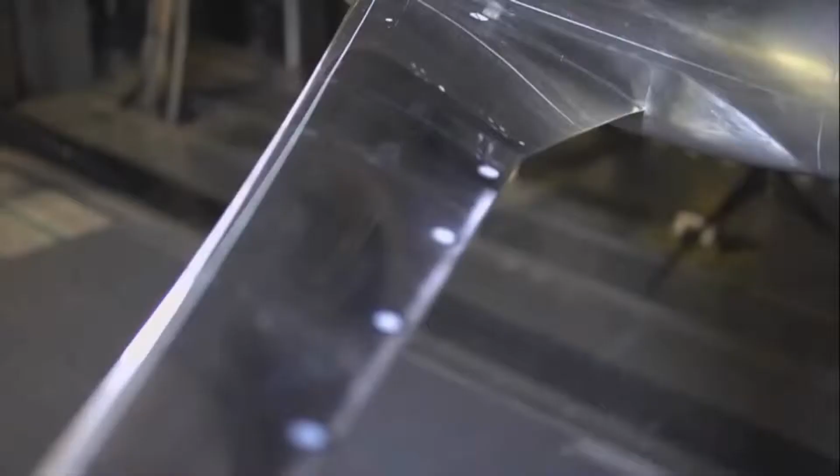Although it's clear that future events remain virtually unknowable, there is one group within NASA that comes as close as you can to seeing into the future. Throughout NASA's field centers, members of the Fixed Wing Project team are peering into the future every day and coming up with concepts that they believe will be on the next generation of aircraft. Because it takes years to plan and develop these concepts, the hardware and theories that are being tested today will be key components that enable the next generation of aircraft to take flight.

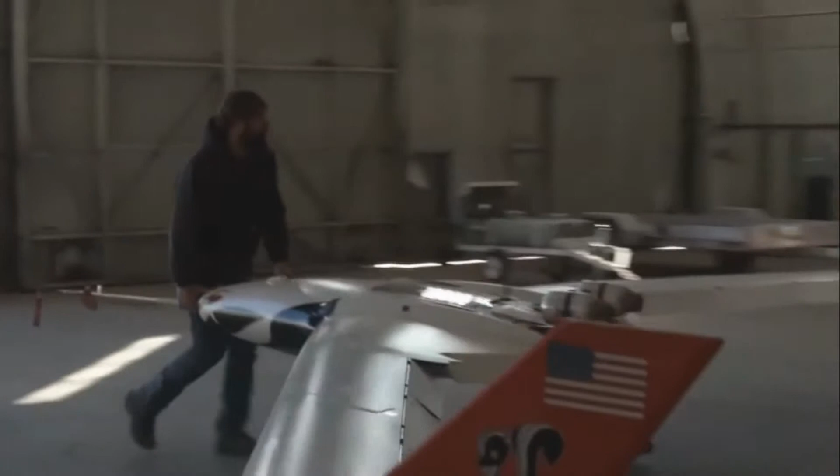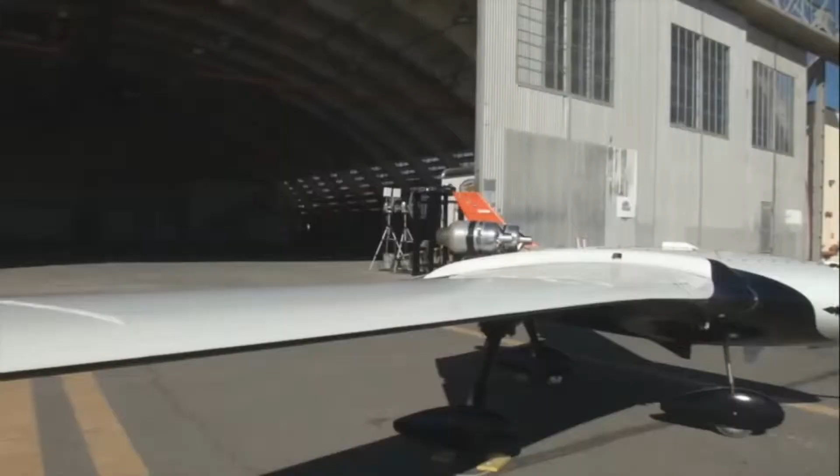On this episode of NASA X, follow us around the country as we visit members of the Fundamental Aeronautics Program's Fixed Wing Project, who are developing the framework that will shape how aircraft of the future will fly. Take a look behind the gates of NASA to see what some of these new ideas look like and how the engineers of NASA are paving the way for the ideas that will change the future of flight.

To the untrained eye, most of the aircraft of today look very similar. This is because over the past century of flight, aeronautical engineers have worked hard to optimize passenger aircraft to the point where they are as efficient and safe as possible. As a result, the basic tube and wing shape has been configured and examined from every possible angle, making it the most efficient design possible today.

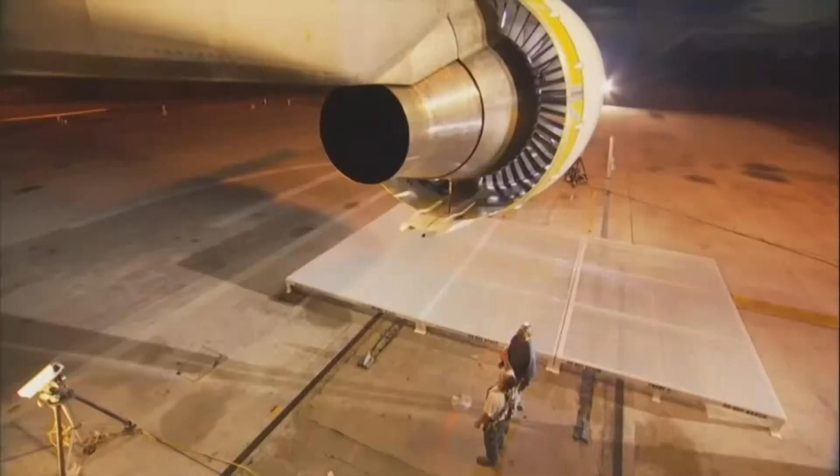Although aircraft have looked basically the same over the past few decades, if you look closely, you can see some of the major design changes. Wings that were once swept back more dramatically now are less so because of advances in aerodynamic shaping. Engines that spewed emissions by the ton are now much more efficient. Materials that were once so heavy that they significantly weighed down a craft are now much lighter and stronger.

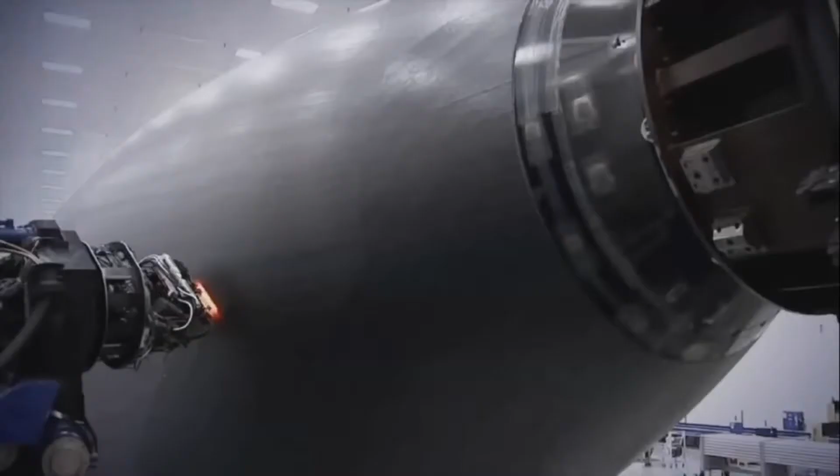With all this improvement and efficiency, it is fair to ask if there is anything else that can be done to make flight even better. The answer is of course yes. Behind the gates of NASA, there are scores of researchers who know that we can still make aircraft better because they are working toward these long-term goals every day.

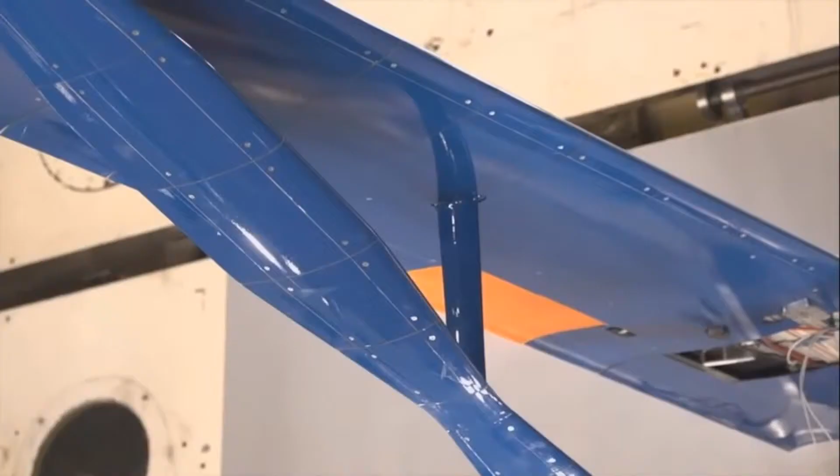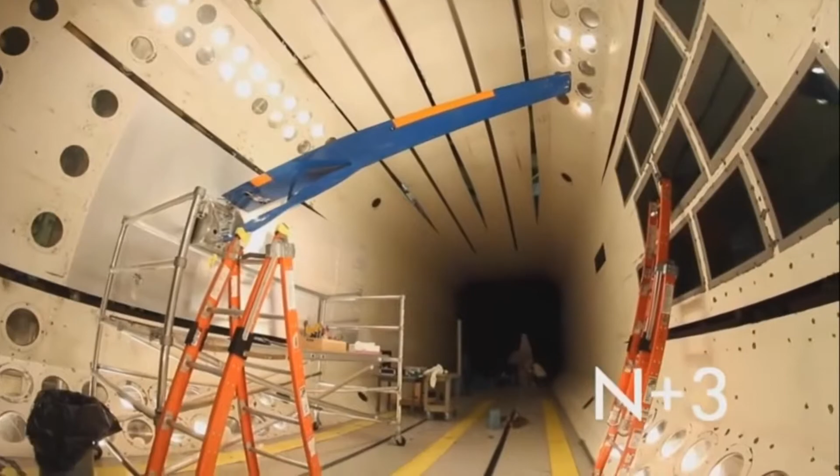Some of these researchers from the Fixed Wing Project are working on so-called N+3 configurations and goals. In mathematical terms, the letter N is where you start now. N+1 is the next step. N+2 is just beyond that, and so on. Here in the Fixed Wing Project, N+3 equates to aircraft that will be flying in around the 2030-2035 timeframe. For this team, everything is on the table, including engines, fuels, wings, and fuselage shapes.

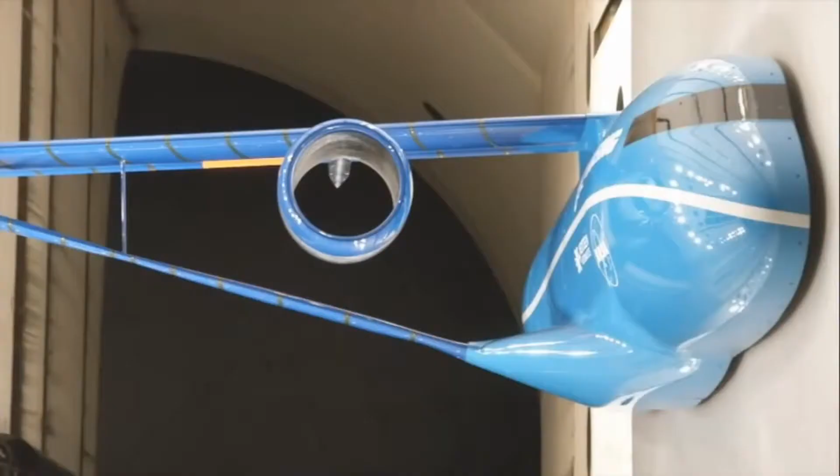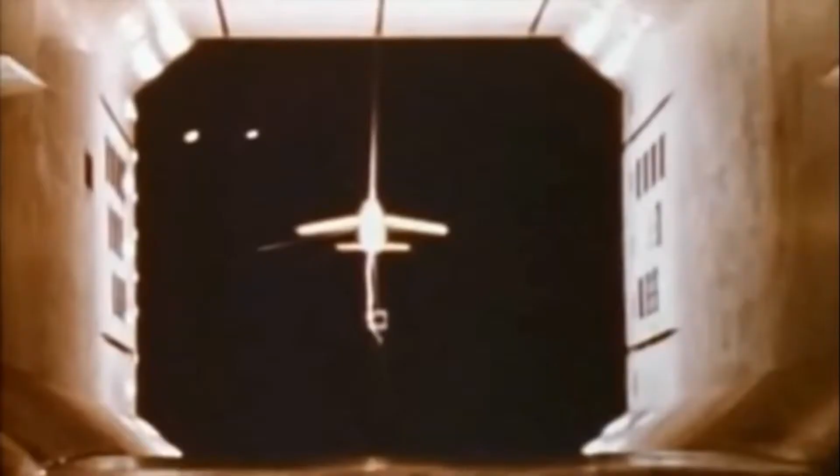Well, we need to remember the first A in NASA is aeronautics. So it's a National Aeronautics and Space Administration. Aeronautics is the field of research for airplanes. The airplanes that we fly today were researched and experimented within NASA many years ago. So we're trying to continue that tradition, that important work that we have done for the nation and the world for 20, 30 years from now.

Fixed Wing is a NASA research program where we are doing activities to try to improve the airplanes that we're going to be flying in the future. We're trying to make them less noisy. We're trying to make them better for the environment. We're trying to make them in a fashion that they will use less fuel.

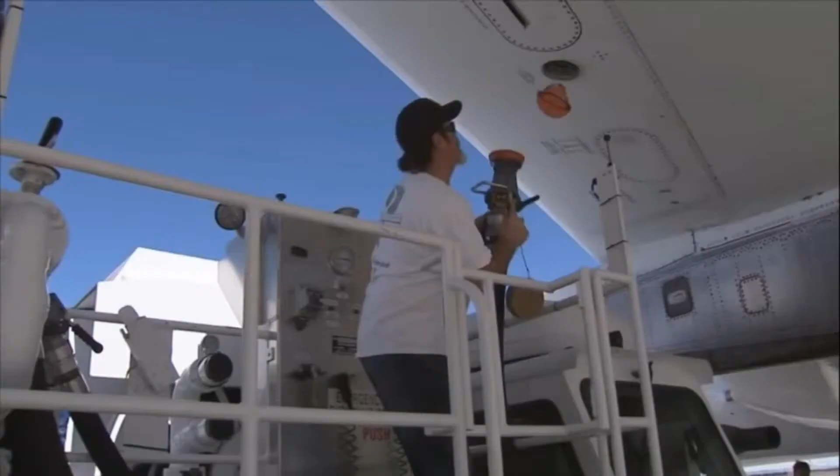The research we're doing is important because air travel is such an important part of your life. People travel, even if you don't travel, cargo gets carried every single day. You use something every single day that gets carried by an aircraft. It's part of our way of life these days, and it often gets taken for granted.

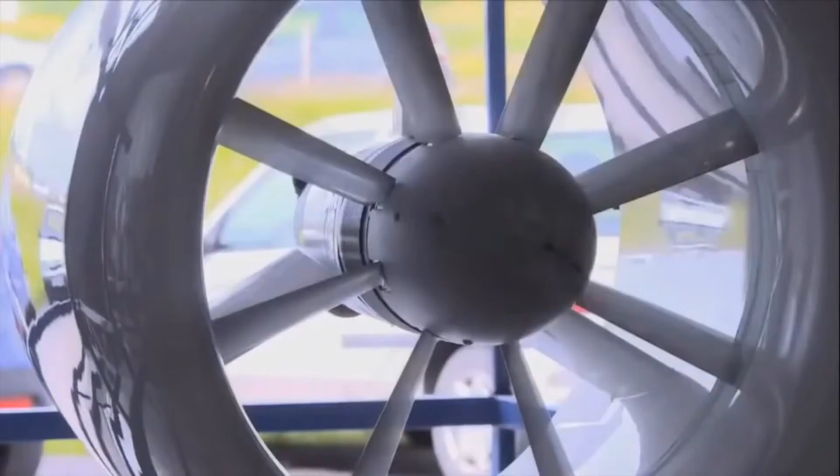There are challenges though, so we are focused on exploring and developing technologies and concepts to improve the energy efficiency and environmental compatibility of transport aircraft. With this mandate to significantly lower noise and emissions and increase performance for subsonic aircraft, there will be a need to address virtually every aspect of the current aircraft configuration, including developing new materials and engines, testing alternative fuels, and even changing the fundamental shape of the aircraft.

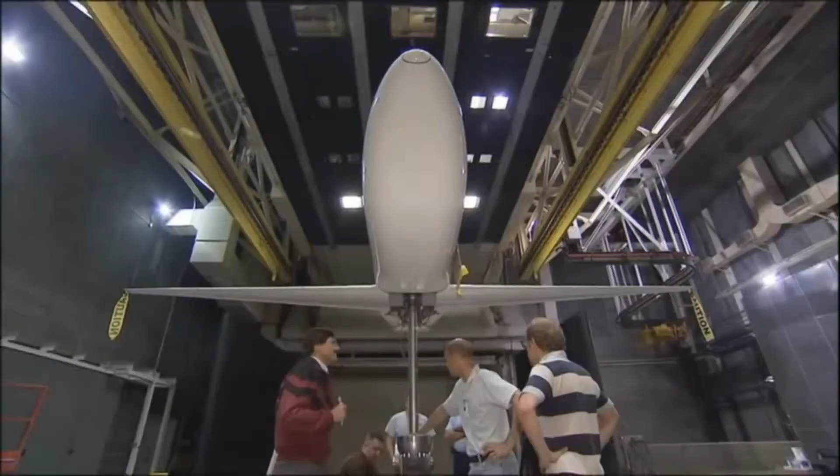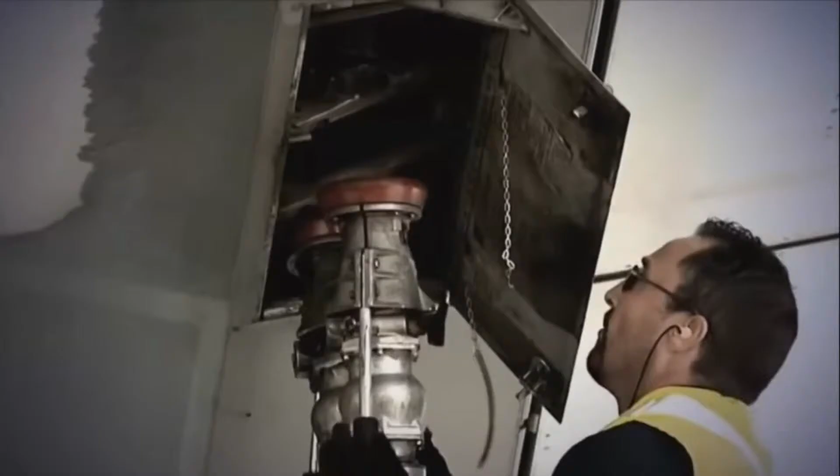All across the country, fixed-wing researchers are doing just that. Major advancements are being made into the understanding of how future aircraft will fly. Because there are so many areas of study, let's first look at something that has the potential to be used today as well as in the 2030 timeframe: alternative fuels.

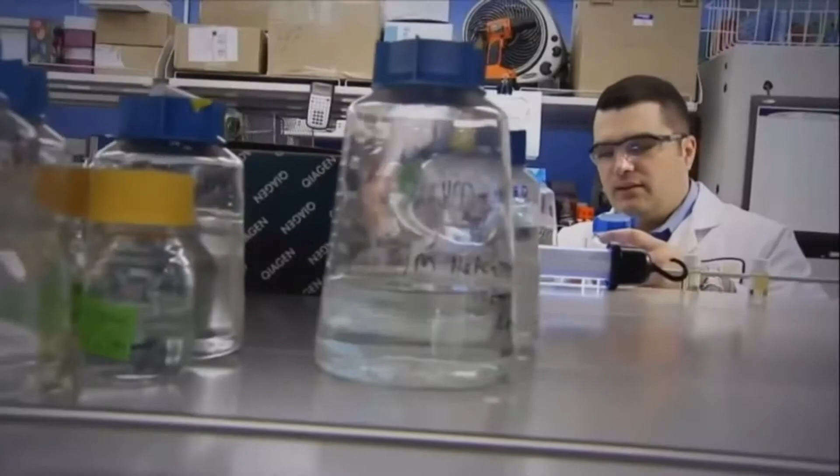On this beautiful morning at NASA Dryden in California's high desert, a test called ACCESS, or the Alternative Fuel Effects on Contrails and Cruise Emissions test, was performed to study the effects of alternate biofuel on engine performance, emissions, and aircraft-generated contrails at altitude.

For this test, two aircraft were flown in tandem. The first is NASA's DC-8, which will be burning an alternative fuel. The second aircraft is NASA's Falcon, which flies directly behind the DC-8 to measure and characterize the emissions coming out of the engines from the alternative fuel.

Here is NASA's Bruce Anderson to explain. NASA's role is in assessing the combustion characteristics of alternative fuels, as well as determining how these fuels will affect the performance and emissions from aircraft.

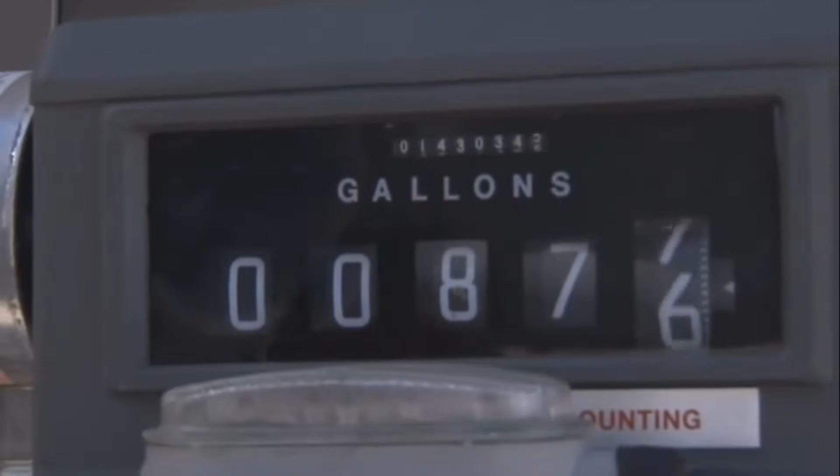To understand how aircraft affect the climate, we need to make measurements at cruise altitudes. So the focus of ACCESS, the alternative fuel effects on contrails and cruise emissions, was to fly behind the DC-8 in flight and look at its emission and contrail characteristics as we changed from standard jet fuel to a fuel that was a blend made from camelina plant oil, with 50% Jet A added to that.

There are some other groups out there. Tyson Foods is making a biodiesel and biojet fuel from chicken fat that they sweep up on their processing plant floors. So there's a number of different ways of making these alternative fuels. All of them result in a fairly clean kerosene that doesn't have nearly the contaminants that fuels from refineries do.

The fundamental thing is the aircraft has to retain its performance characteristics when you burn a fuel. You can't have any drop in power. The fuel also has to have similar characteristics in terms of density and volume to kerosene. So what we're looking at is drop-in fuels.

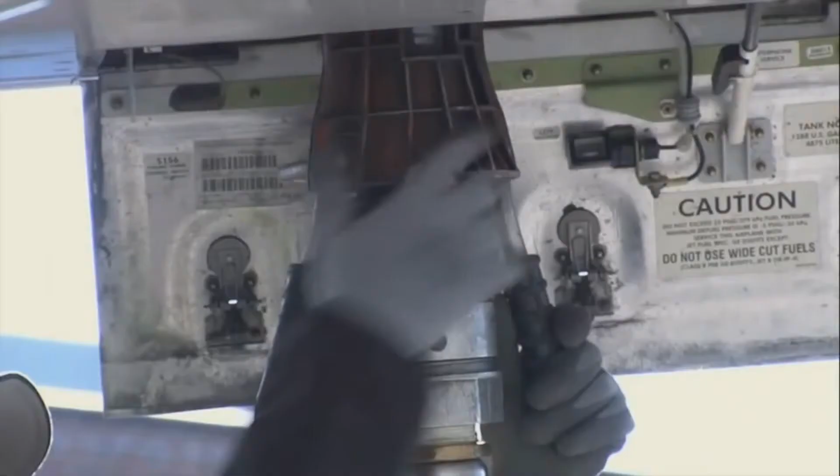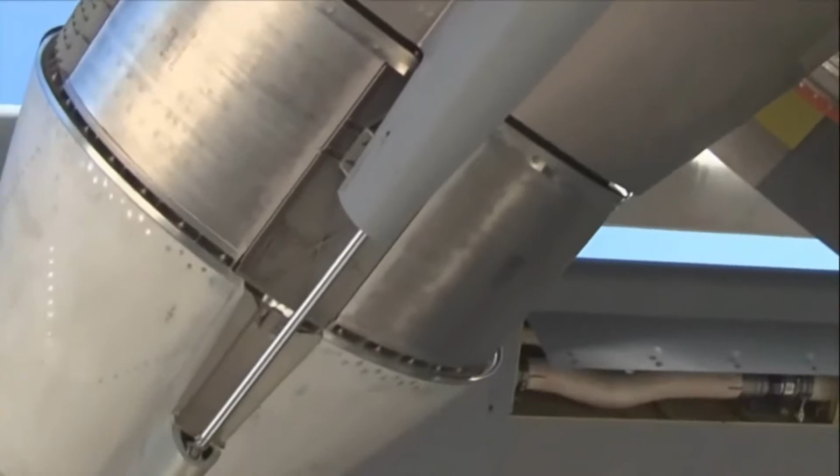A lot of the fuel systems on the aircraft are designed to rely on the aromatics in the fossil fuels to swell the seals to make them leak tight. So when we fly an alternative fuel, we have to mix it with standard fuel to retain those properties. Otherwise, the fuel would just leak out of the aircraft.

And then the second thing we're looking at is just the emission characteristics. By that I mean the amount of pollutant generated per kilogram of fuel burned.

After the first few flights, it was shown that using these types of alternative fuels could significantly reduce emissions at cruise altitudes, particularly soot emissions. Work continues to better understand how to use these fuels and how to make them even more efficient for future aircraft.

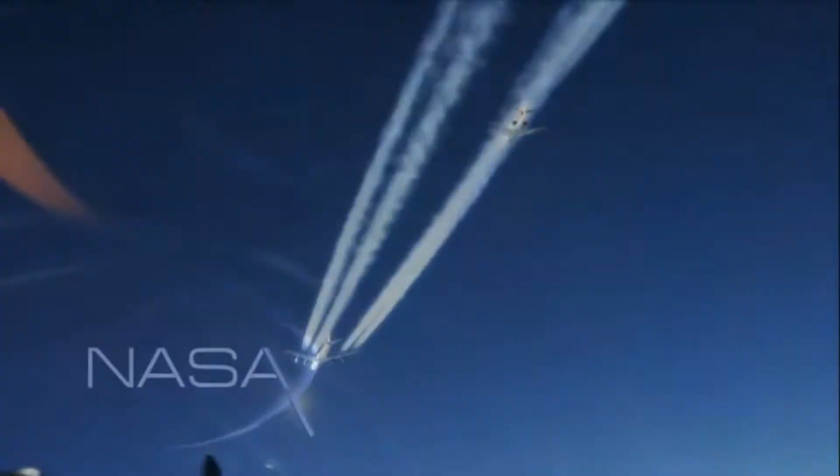Other than alternative fuels, there are some other ideas out there for finding more efficient ways to power aircraft. If we look on our roads today, many of the cars being driven run on a combination of fuel and electricity. The idea that aircraft could do this seemed far-fetched only a few short years ago, but today this idea is gaining traction. There are several ideas on how to do this, so let's take a look at a few.

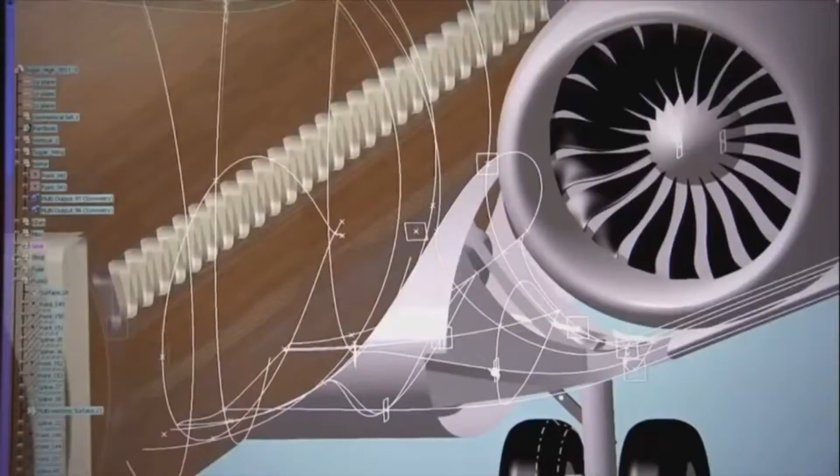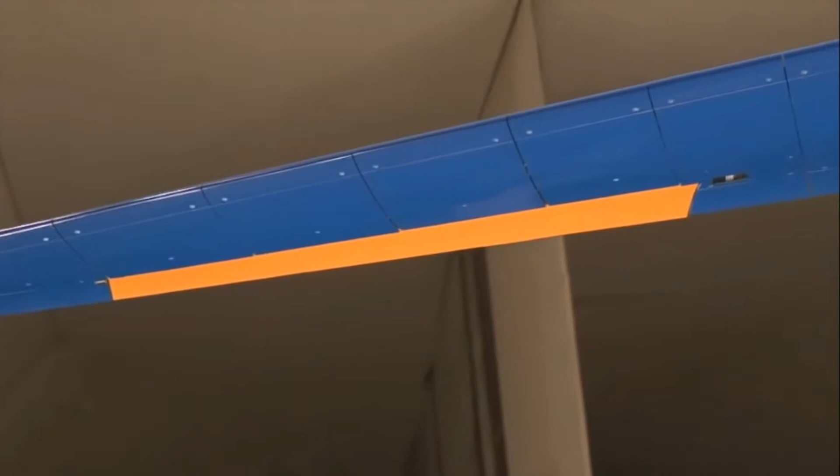Here, a team is looking over a new Boeing aircraft design called Sugar Volt. This unique design has several interesting changes, like the truss-braced wings that have the potential to reduce the drag of the wings by making them longer and thinner. Because thin, long wings have the tendency to flex more, designers have included a clever, efficient truss structure to support them. This design has the potential to reduce drag and weight, making the craft more efficient to operate.

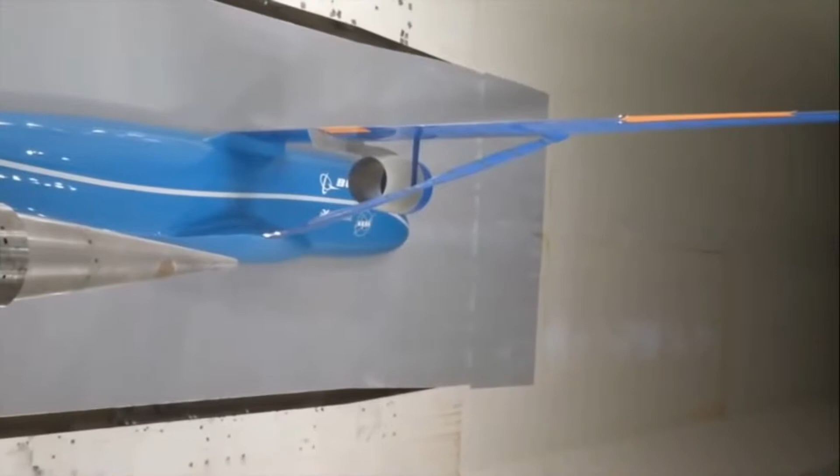At first glance, those unique structural changes may look like the biggest game changer for this type of aircraft, but the Sugar concept holds another surprise as well. What's less obvious to the eye is that it has an unconventional propulsion system.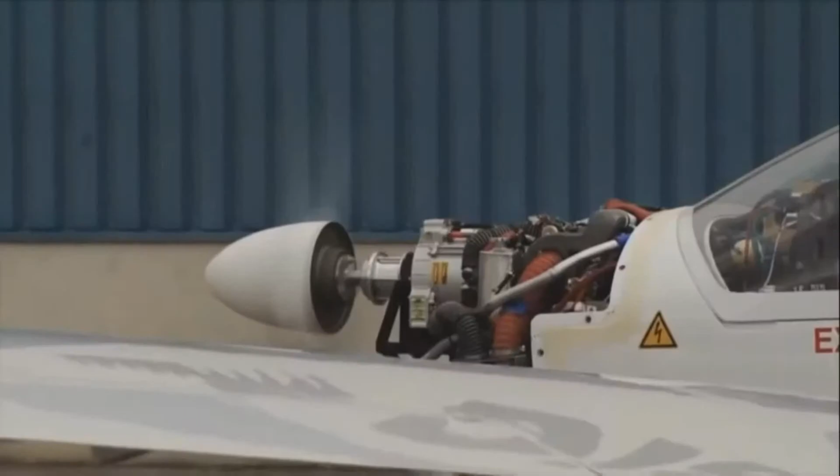It's a hybrid gas-electric concept that's closer to what you see in a Prius. It has batteries and gas turbine engine technology. It requires advances to battery technology, but those are happening throughout the world independent of the aerospace industry, and we're trying to leverage that. We do it on cars, we should be able to do it on airplanes eventually.

The challenge is to take those batteries and have enough energy or power content while keeping them lightweight. Where we are today, I think, is at the dawn of the age where we can start to see electric propulsion or hybrid electric propulsion.

And you'll see it on smaller aircraft first before you see it on the large commercial transports. But that's what we're working towards. It's good for cleanliness, it's good for noise, it's good for energy efficiency. It has its challenges—that's why we're working on it, and that's why it's not being done today.

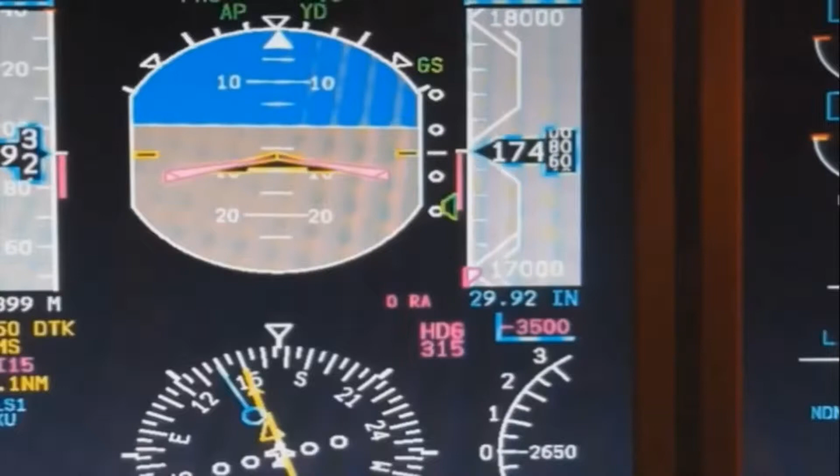The idea behind this vehicle is to have its twin engines burn fuel when great power is needed, like at takeoff. But when the craft is in a cruise configuration, a switch can be made over to a battery electric mode to supplement or even replace power to the engines. If successful, this could reduce fuel burn by up to 70%.

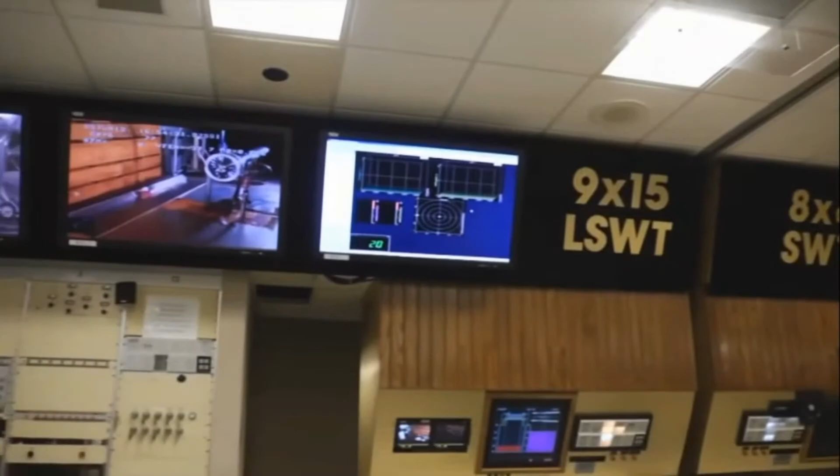Another concept called turbo-electric propulsion is being studied here at the NASA Glenn Research Center. Here is NASA's Jerry Brown to explain. There's not been electric airplanes except in very small size.

The reason is that electric motors and generators tend to be too heavy for flight. We're hoping to change that, and we're hoping to get a benefit from saving a whole lot of fuel in the process. The type of electric propulsion we're talking about today is turbo-electric propulsion. We're going to keep the turbine engine because it's really good for providing a lot of power in a small power plant. And then we're going to use its power to drive a generator, send electricity to motors that drive fans that do the propulsion.

This concept will look very different from vehicles of today. Potential designs include two large turbine engines on the wingtips that will drive two large generators inside the body. The generators will in turn power a number of fans, providing the propulsion the aircraft needs to fly.

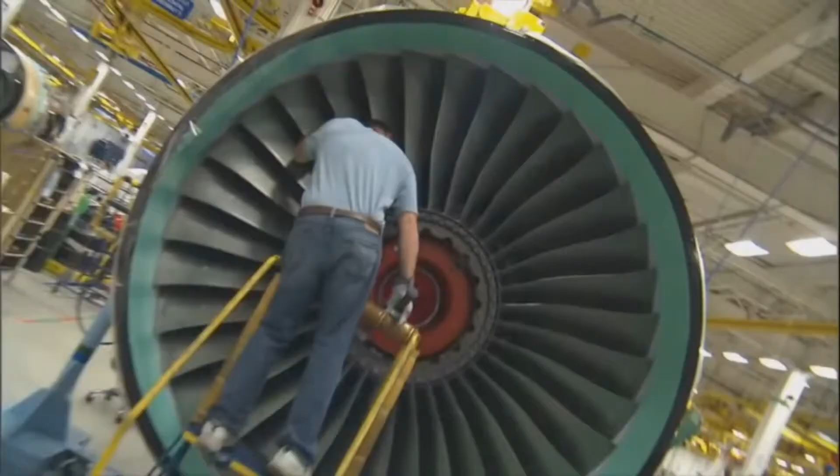What we want to do here is be able to break the turbine engine from the fan, and that gives the aircraft designer a lot of freedom. If he can move the turbine engine somewhere else in the airplane, that may itself have advantages. The engine and the fans don't have to turn at the same speed. You don't even have to have the same number of fans.

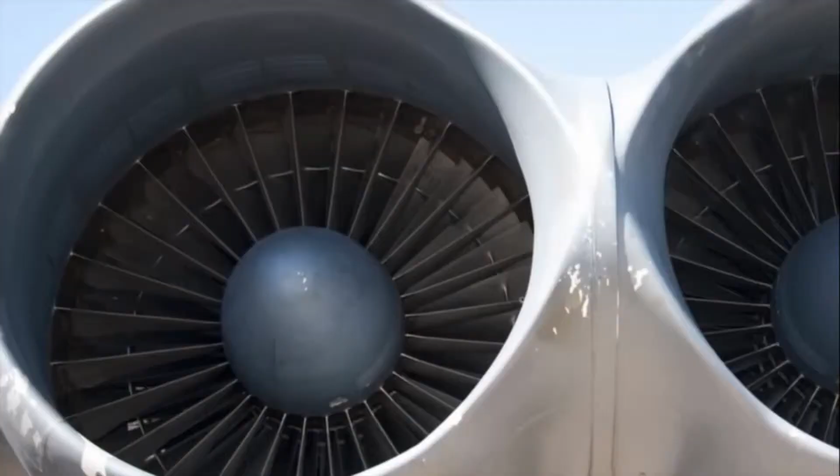That's what we're really looking for — we want to have an array of a whole bunch of fans, maybe 15 of them, say, and just 2 engines. You like to keep just 2 big engines because the big engine is much more efficient.

This idea is intriguing, but big changes need to be made to make it viable. One major challenge is the need to reduce the size of the generators, because the generators of today are way too big to fit on an aircraft.

One idea the NASA team is looking at is a way to remove the current type of copper windings in the generator and replace it with superconducting material. This change would allow the generators to shrink, making them viable to fit on future aircraft.

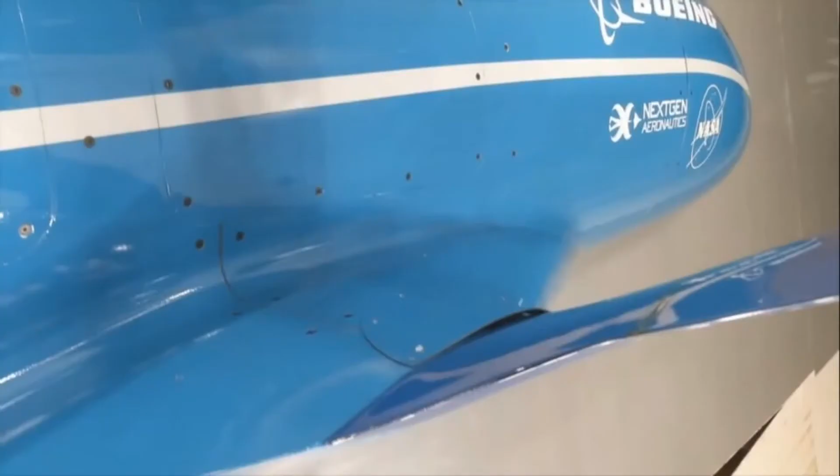As we've seen so far, new aircraft designs are coming online that have the potential to greatly improve aircraft efficiency. Another of these revolutionary designs has come out of a joint MIT and NASA study. This unique design is called the double bubble and has the potential to reduce fuel burn by up to 70% as well.

The MIT D8 double bubble design is something we've been working with MIT on for a number of years. The idea is to take some of the lift that you would normally get from the wings and try to move that to the fuselage.

Another thing that's done to enable laminar flow on this vehicle is to reduce the sweep of the wings. It is easier to maintain laminar flow if the wings, instead of being swept back like a lot of modern commercial transports, are more perpendicular to the side of the body of the plane.

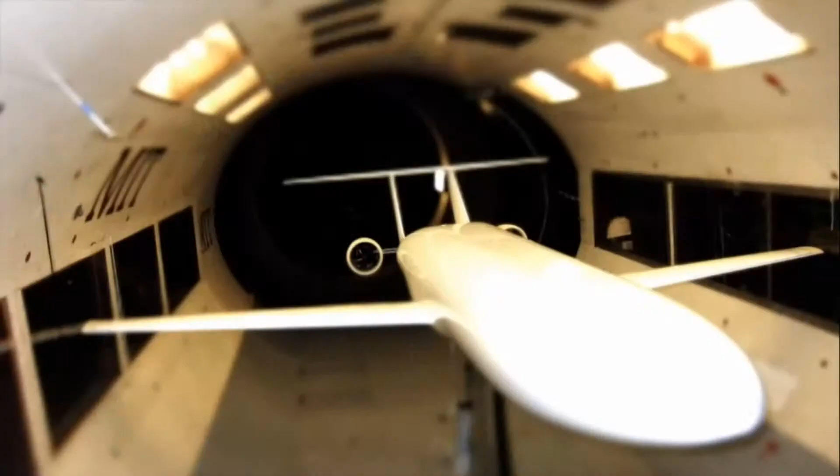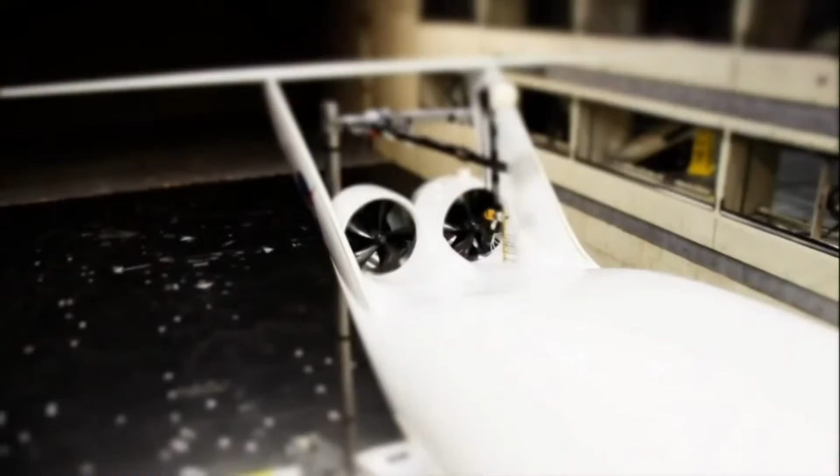We're trying to push the envelope, to see what is the maximum benefit that could be obtained by this kind of configuration, to understand what's really possible in terms of fuel savings. Aiding much of the work is improved computational fluid dynamics and wind tunnel testing.

Right here in this building, we have the Pleiades supercomputer, which is one of the largest supercomputers in the US and in the world. It has 200,000 processors working on the problem if you use the whole machine on one problem. So it's a very large machine, and we need that very large machine because we need to do very big problems here at NASA.

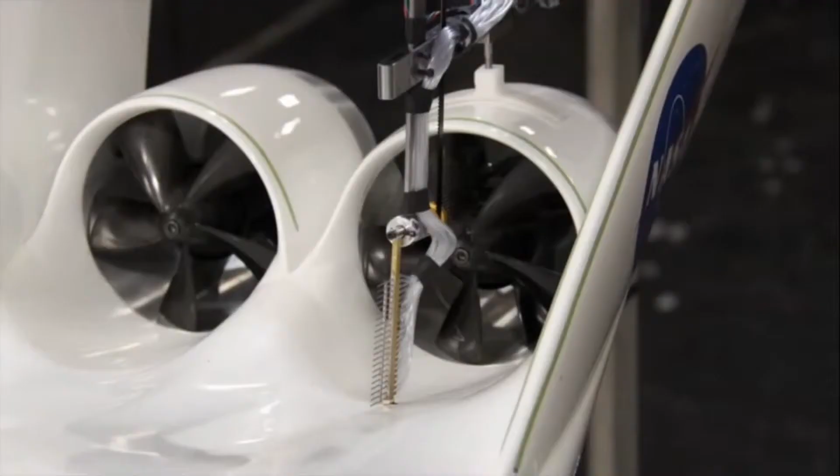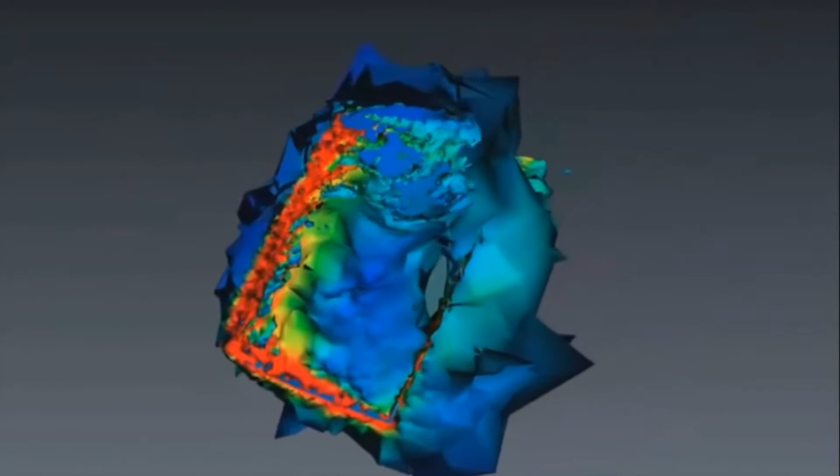The Aeronautics Research Directorate is using it to try and simulate the flow over these N+3 configurations. To capture all the detail you'd see on a vehicle like this, including what's going on inside the combustors of the engines, you need a lot of grid points to resolve all the fluid motion inside those engines over the airplane. Having that many grid points to resolve all that physics in 3 dimensions creates very large computational grids that require very big machines to advance the equations that govern the fluid motion and get these CFD, computational fluid dynamics, solutions that we use to make our assessments.

Aerodynamicists of today are able to model ideas on computers, which allows them to test many different configurations before a wind tunnel model is ever built.

Once a design is agreed upon, a wind tunnel model can then be fabricated and tested. This process was used for the double bubble as well, but the wind tunnel test showed surprising results.

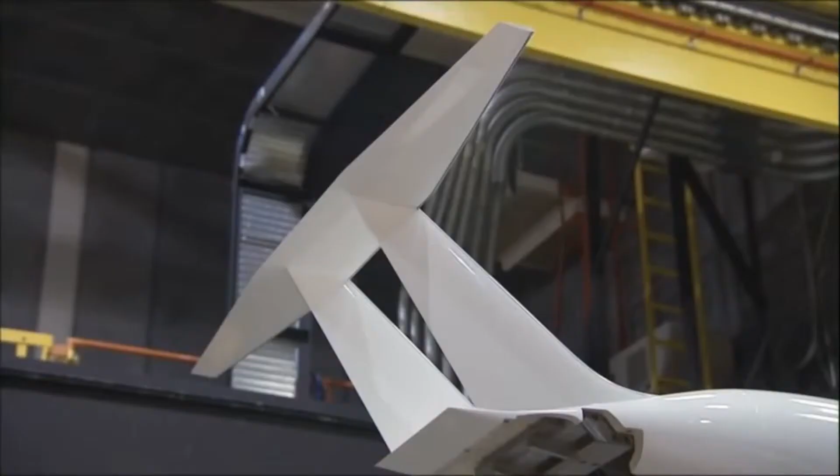The good news is we've just completed the first test of this configuration in the Langley 14x22 wind tunnel at NASA Langley. And it showed even a greater reduction, or a more fuel efficiency benefit, to this technology than we had predicted on paper with our low-order models. So we're trying to digest the experimental data that show this nice benefit in fuel efficiency from this configuration.

At the same time, we're also using the supercomputer here at NASA Ames, the Pleiades supercomputer, to do computational fluid dynamics runs of these same configurations and see if we can confirm that benefit on the computational side as well. Testing will continue on the double bubble, and if the results hold, you may see this type of aircraft at an airport near you in the future.

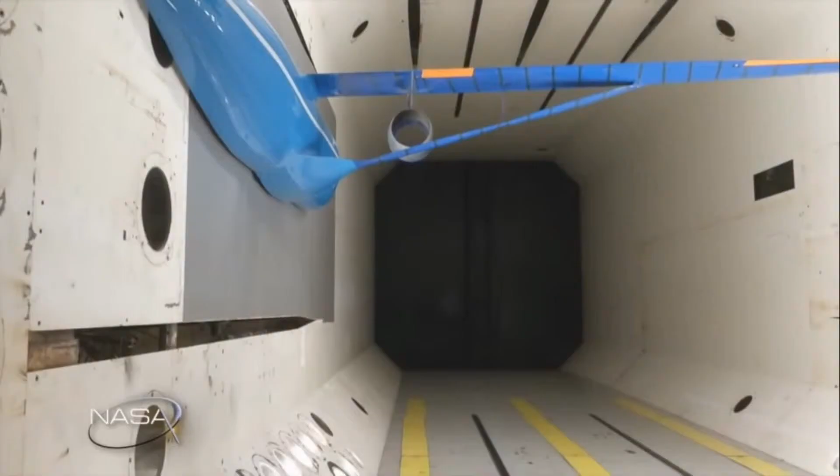When testing aircraft, many different stages occur. We have already mentioned CFD and wind tunnel testing, but another tool in testing future designs is to build a flying scale model. Although CFD and wind tunnel modeling is the mainstay, often test flights of these small, scaled-down versions of an aircraft offer some of the most dramatic results for researchers.

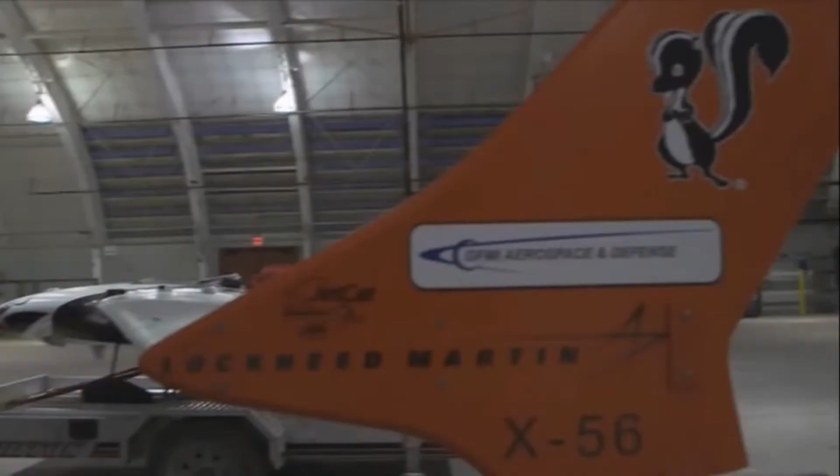That is the case with this aircraft, called the X-56. This aircraft is being used as a test bed to understand how different wing configurations work, and how a unique idea called active control may be used in the future.

The whole concept behind the X-56 is that it's long been known that a very long wingspan vehicle is more efficient than short wingspan vehicles. The problem is, when you get a very long wingspan, you start to get into issues with flutter modes that creep into the vehicle, so the wing will go unstable and, in extreme cases, will rip off the vehicle.

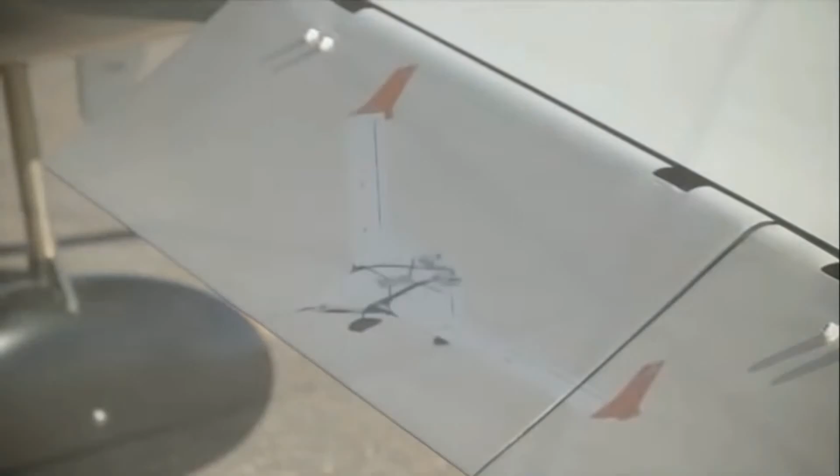To get around that problem, you can use active flight controls to suppress those flutter modes. Active control means you put things like accelerometers within the wing, and as soon as you sense the wing is starting to get into these flutter modes, you use the control surfaces behind the wing to damp that out. So the airplane, as it's flying, is continually fighting these modes and keeping the wing straight and stiff. Then you can build a lighter, longer wingspan vehicle that is more efficient.

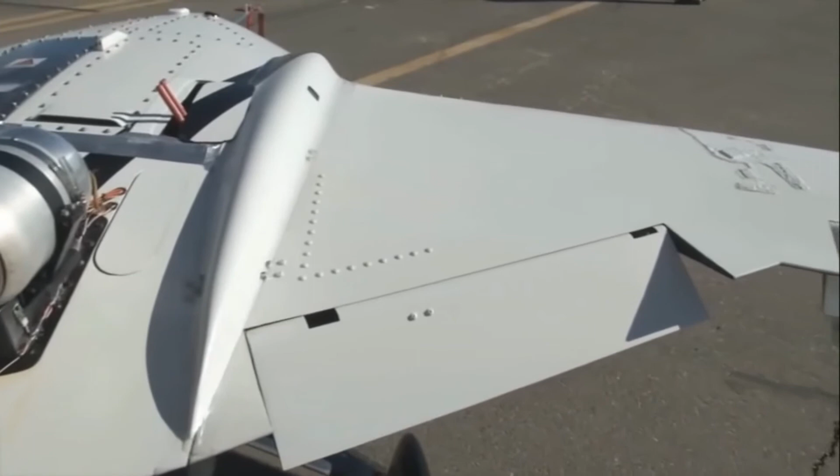This vehicle, funded by the Air Force, was built as a multi-utility technology test bed. They call it the MUTT for short, and it's built to do a lot of different kinds of testing in aeronautics. The wings are removable. You can put on a stiff wing, a flex wing, or do a joined wing configuration. We can learn quite a bit from testing this kind of vehicle.

Right now the focus is on flexible wing and active control of flexible wings, but in the future there are many experiments that can be done with this vehicle.

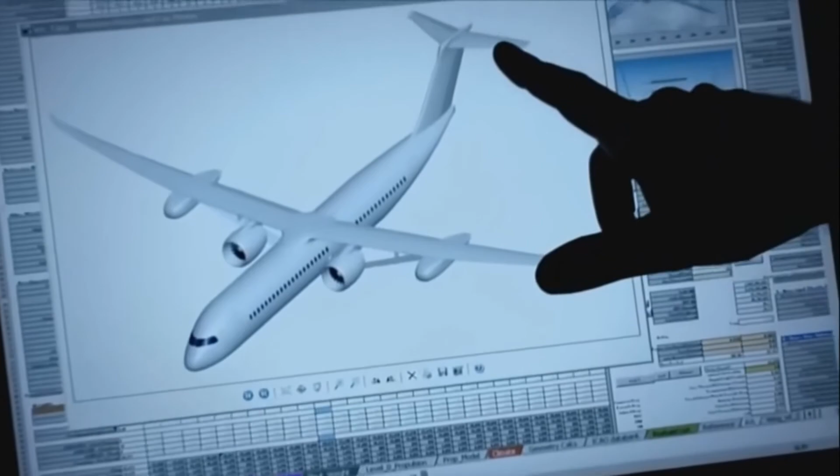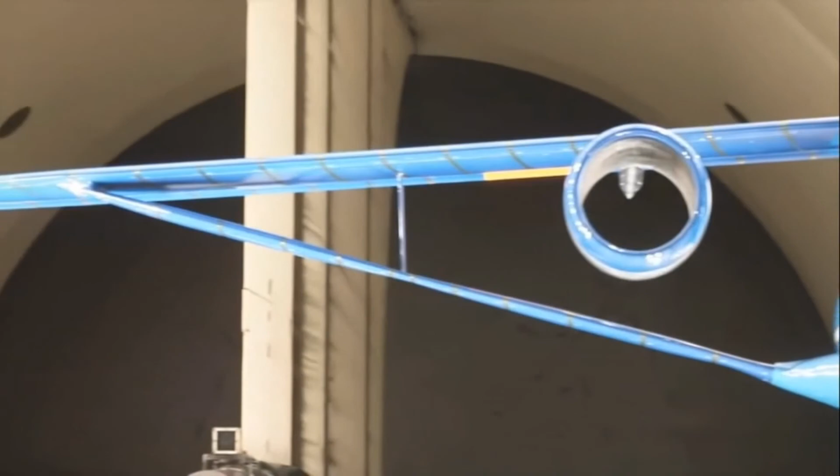The research on the control of lightweight, flexible wings being performed today on the X-56 is key to enabling the long, thin, low-drag, and low-weight wings of tomorrow's N+3 configurations.

Much is going into understanding what it will take to improve the already incredibly efficient aircraft of today into ultra-efficient vehicles of the future. Although we don't have all the answers yet, it's clear that NASA and its brilliant engineers and researchers are helping to lead the way to a safer and more efficient way to travel.

We are nowhere near the maximum that we can get out of this industry, and there is a lot of work to do—and that's what my team is doing.